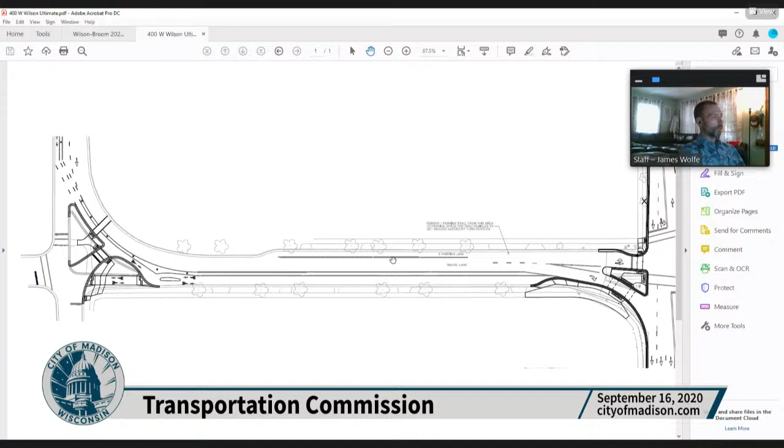Per the corridor plan, the ultimate plan on the 400 block would be to reduce this to a single travel lane, maintain the parking lane on the northerly side, and then we could mark the 10-foot two-way cycle track on the south side with a buffer on the street.

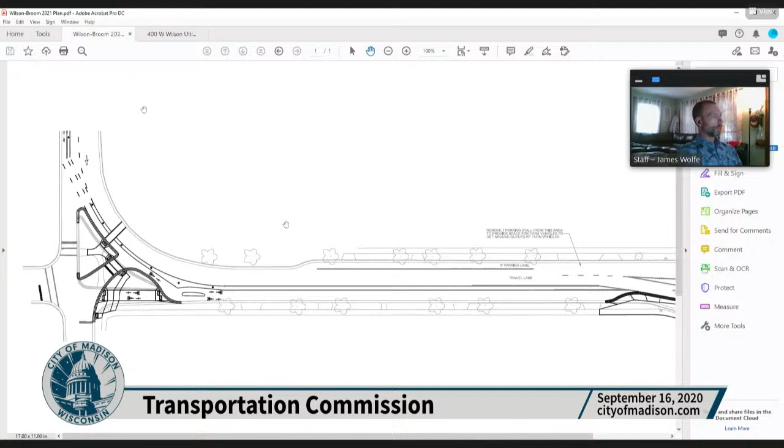So all of the curb work at the intersection with the shared use path and everything will be set up for this ultimate condition. It'd just be a matter of redoing some of the markings in the future whenever the Bassett corridor plan and the reconfiguration of the Bassett and Wilson intersection will get completed. I think that's what I have in terms of a presentation on the geometrics.

Okay, are there questions or comments for Jim? Grant? And then Bridget. Thank you. Yeah, no questions. Just wanted to say thanks again for all the great design work on here. I'm glad that we waited for the corridor study to be complete, and I think we've got a really, really great design here. And also thank you for working on that intersection, getting that little bit of an improvement there with the bump out, and also really looking forward to implementing the Bassett corridor to be able to continue the cycle track through that 400 block.

So I think this is a really, really exciting project, and it's really going to be a huge improvement to bike access in the downtown area. So thanks for all your work on it.

Thank you. Oh, Bridget? One other thing that I thought of, I'm sorry, can I interject just another thought? Sure. Another part of the discussion was at the Doty intersection. I did check in with Gretchen, and we would be able to provide a leading pedestrian interval here for the bike and pedestrian crossing. I noted that on the plan, but didn't specifically mention it as I was going over it. Thank you, Jim. Bridget, go ahead.

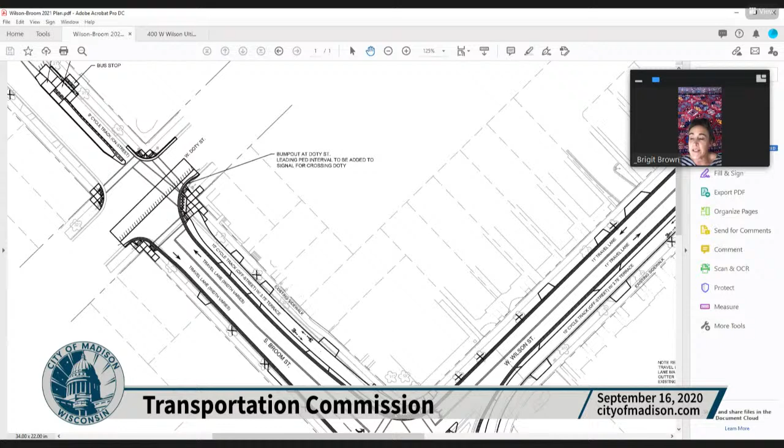Yeah, Jim, first, thanks for the presentation. I'm wondering about the signing plan, when that might be available. Typically, that is done internally by traffic engineering staff, and is usually available a little bit closer to the end of the construction project because it isn't part of the bidding documents. So I guess I'd just like to then provide input now. I know a lot of my neighbors, myself included, use those first two driveways there.

And with the bidirectional traffic coming, I know there's a lot of concern, particularly because even now it can be difficult for us to be able to pull in and pull out with some of the traffic speeds there. So, we'll have slightly more constrained motor vehicle traffic there with one travel lane and the addition of the bidirectional bicycle traffic.

So I just want to make sure that careful consideration is given to signing in that area, in terms of notification as appropriate for all types of traffic about the driveways, and particularly for Doty School right on that corner there. It's just a tough, congested area, as I'm sure you're aware. Yes. And another thing to note too that may be helpful for the driveway access is we will be making signal phasing improvements at the intersection here too.

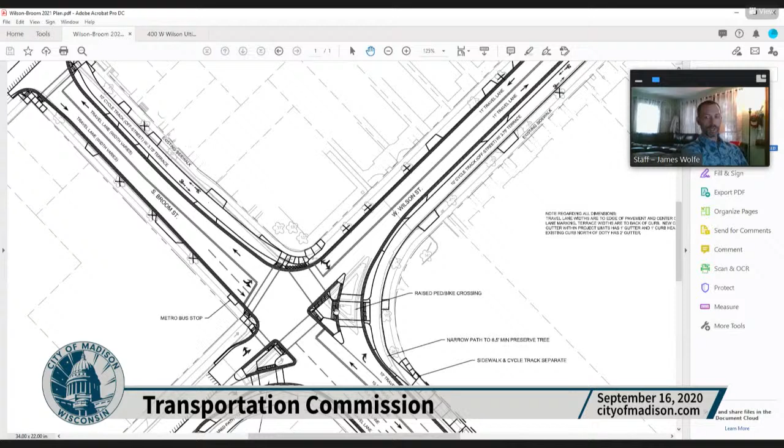And I guess along those same lines, then, if you can be sure to make working actuating buttons for pedestrians. Those don't exist at this time on all four corners. Yeah, we can certainly take a look at that. Some of it is going to be a little difficult, especially with how we plan to signalize this right turn lane, that during all times we want to have this crossing have the priority, so this right turn signal is going to be a flashing yellow or a red.

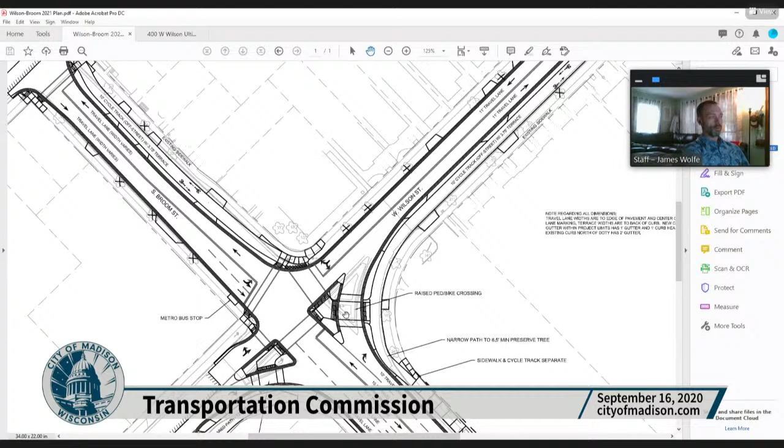So when we do that, I don't think there's going to be a specific ped signal there. Is that correct, Gretchen? I think I saw you were on. Yes, that's correct. And I am thinking more, frankly, about the northern Broom Wilson corner that doesn't have a ped signal right now. This one, up here? It has a button, but no signal, which is an odd combination.

And then one other thing quick, you did mention that the kind of southern, for lack of a better description, limit of the project is at John Nolen. Yes. Right. And I guess it is right outside of that limit, but I've had a lot of issues lately, especially with folks turning onto Broom from John Nolen and nobody stops, and being able to cross as a pedestrian right there has gotten progressively more difficult.

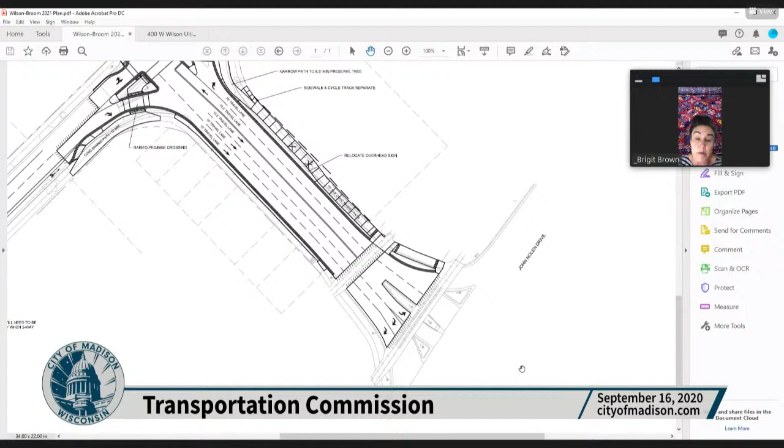And I know it's just outside of the project limit, but if there's something with signing just outside of the project limit that could be done there, really nobody stops at the stop sign there. Oh, on this right turn? Yep. Gotcha. I think we are going to signalize that right turn. Great.

I think Gretchen was going to maybe try to do it earlier, but I think with the project pending, we're holding off until the project was done. Okay, I think that would be a great improvement. Thanks. The right turn will be signalized. Great. Gretchen or Yang, did you have comments about that?

Yeah. Thank you, Bridget, for those good comments. As Jim mentioned, we typically do the signing plans a little bit later because those are done by our crew in-house, not part of the bid document. So we'll definitely keep those in mind, look for opportunities to improve. So really, I think they can go hand in hand with the others, like other ped bike improvements, signal timing

improvement. It's our goal to improve the ped bike access in this area. Traditionally, as we all know, it's very tough. Hopefully, in other projects, we can improve it significantly. So, yeah, thank you for the comment. Okay, are there other comments on the project, on the geometry? Anybody? Okay, I don't see any hands.

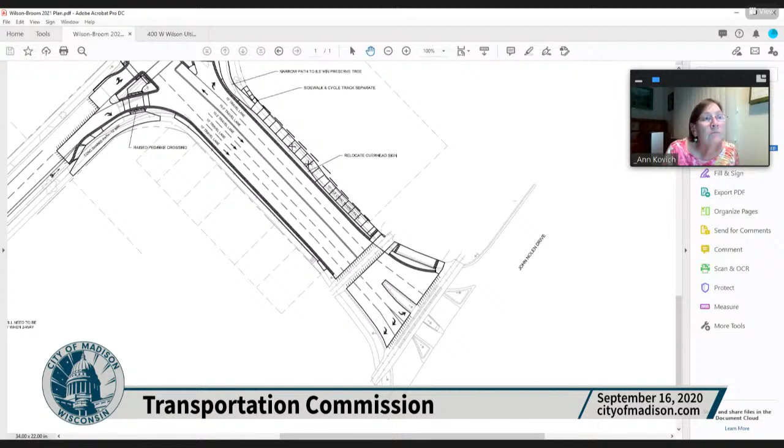So I would need a motion to approve. I'll move approval. Okay, I'm sorry, who was that? Chris. Chris? Okay, and I see, Grant, you had your hand up as well? And Bill? Somebody want a second? Is that what your hand was up for, Grant? Yeah, I second. Okay, so we have a motion and a second. Bill, did you have further comments or were you seconding? Okay. Is there any further discussion?

Okay, we'll assume a unanimous consent approval of the resolution for the roadway geometry. Unless you prefer to vote no, if you would, please raise your hand. Or if you'd like a roll call. Okay, I don't see any hands raised, so the motion carries as unanimous consent. Thank you very much, Jim. Looks like a lot of great work has been done on that intersection. Thank you, Gretchen and everybody.

Okay, next we have the BCycle annual update. Do we have those folks on, Renee? So they were in the attendees, I think. Oh, yep, here they are now. Okay, so we have Helen Bradley and Brian Conger. I don't know if I'm saying your names correctly there, Helen and Brian. Yes, you got it right.

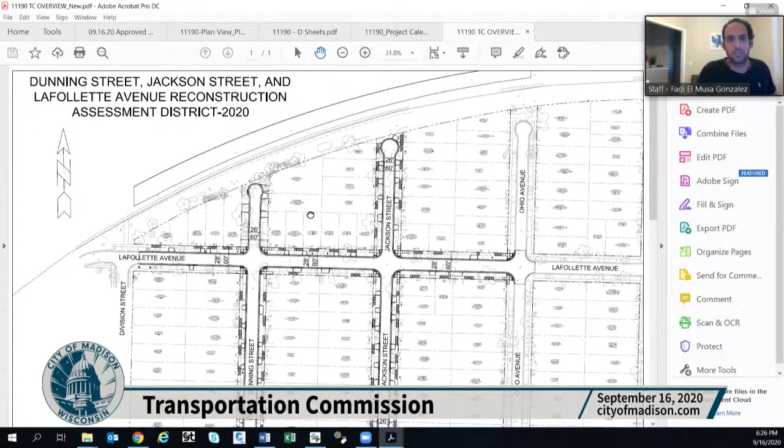The limits of the project are La Follette Avenue, just east from Division Street to Ohio Avenue. We have Dunning Street from Atwood Avenue to the dead end on the north side, just short of the railroad. And finally, we have Jackson Street from St. Paul Avenue on the south side to the street's dead end on the north side, also just short of the railroad. So this is a typical street reconstruction project on a residential area.

With this project, we're proposing to replace the existing curb, gutter, pavement, driveway aprons, and sidewalk segments that are in poor condition. So with this project, we're not proposing to have any changes to the current geometrics. As you can see, I'm going to zoom in on Dunning Street.

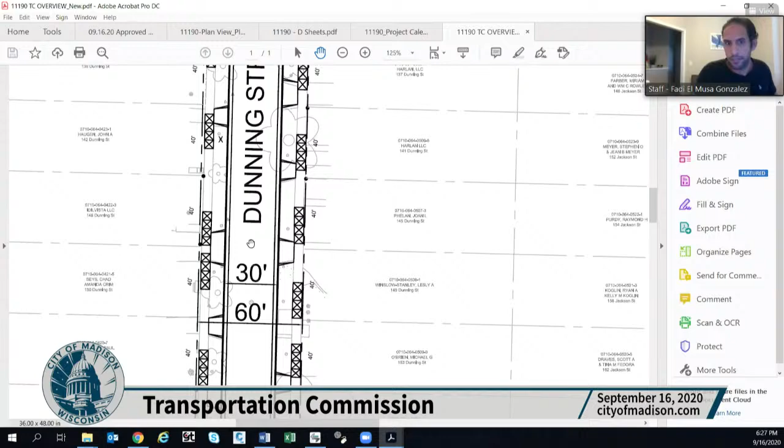Basically, we are replacing the curb in the same location as the current curb. So the proposed width that we have is 30 feet on Dunning Street, 26 feet on Jackson Street, and 28 feet on La Follette. So as I mentioned, all of the streets are going to keep the same width as they are right now, except the section of Dunning Street north of the Dunning and La Follette intersection, so that would be this portion right here. At this time, that section does not have any pavement, curb and gutter, or sidewalk. So with this project, we are proposing to have pavement installed, also curb and gutter on that street. So that street would be 26 feet wide, measured from face of curb to face of curb.

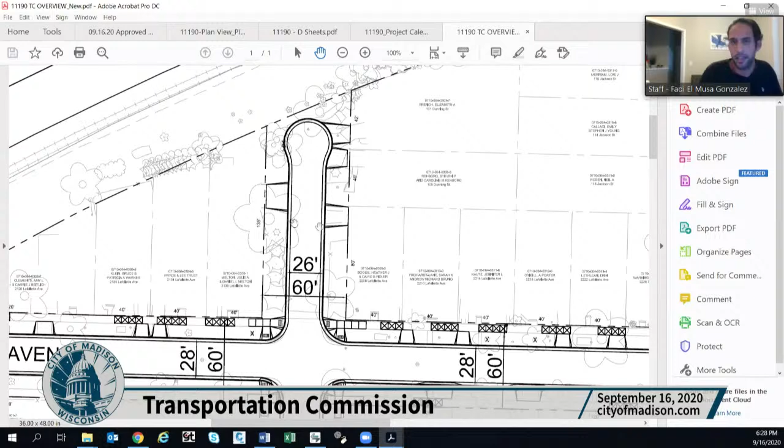Also, please note that we are not proposing any sidewalk on either side of this section.

Also, with this project, we're proposing to replace all the pedestrian ramps. Right now, most of them do not meet ADA compliance, so those should be replaced and installed per those ADA guidelines. On the south side of Dunning Street at the Atwood intersection...

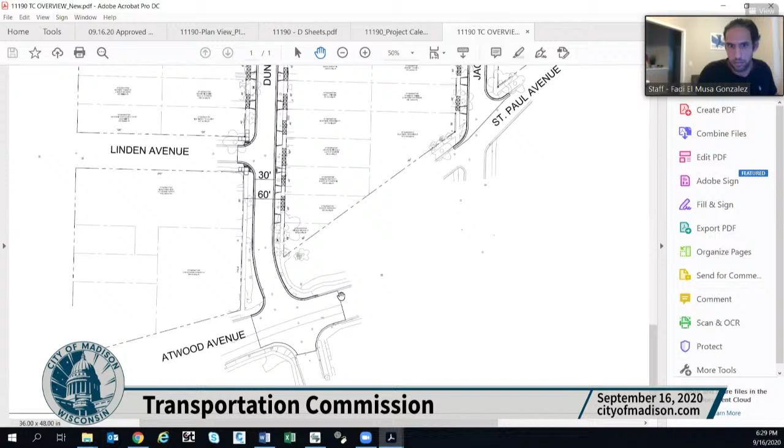At Dunning and Atwood intersection, we're proposing to replace the existing pavement and pavement markings. So that would be the section that I'm showing on my plan here, shown within the black line.

And finally, we are proposing to have some bike sharrows on La Follette Avenue for the bicyclists that are using that as a bicycle route. So that pretty much covers the scope of the project.

So last week, we held a public information meeting. Basically between 30 and 40 people attended that meeting, and some of them presented concerns in regards to high traffic speeds on Dunning and La Follette specifically.

So we had traffic engineering staff there, and because of those concerns, traffic engineering is going to do some studies. They're going to be collecting data next month to see if we can install speed humps on Dunning and on La Follette Avenue.

If those studies justify the installation of those speed humps, that plan should be presented before the TC for review and approval. So I think that pretty much describes the plan. And that's it.

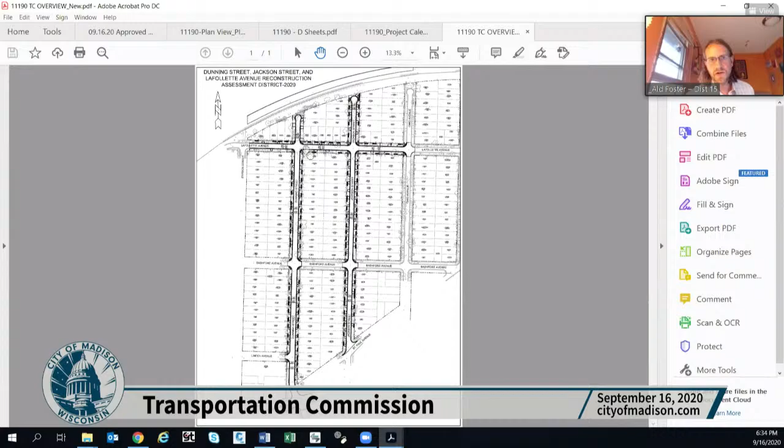I think it's interesting, if you zoomed in a little bit on this, the two streets where they're talking about speeding are also the two wider streets here. So nobody mentioned speeding on Jackson, which is only 26 foot wide. I was reflecting on this in this neighborhood, I checked in. Worth Court is a good example where, as a person on a bike, there's nobody ever speeding there because it's so narrow. It's a two-way street with parking on both sides, and it's only 24 foot curb to curb.

I think South Bryan was recently redone. And again, I find it really has a really good feel, and there's not speeding there. That's also 24 foot.

That one's only got parking on one side. I know that in the past, the fire department has raised some concerns about narrower streets, but I think there's quite a bit of good information out there around that. And given this opportunity for a full reconstruct, I'd really like to take a serious look at that.

What would it mean if we brought these down, at least to 26 like Jackson, or even 24? I know I've heard some complaints from my residents in the wintertime, and they feel like it's just way too narrow, but it's kind of exactly what works to bring car speeds down, because you can't just fly through. You have to sort of navigate it.

I'd really ask that before making a decision on speed humps, if we could really consider street narrowing with this project, because I think it could have a positive impact on the speed concerns. And also, it's just less pavement. I would expect it would be less cost, by pulling that out, and gives us more green space, wider terraces, more infiltration for stormwater. So I think that's pretty consistent with where we're trying to go. So thanks for the presentation.

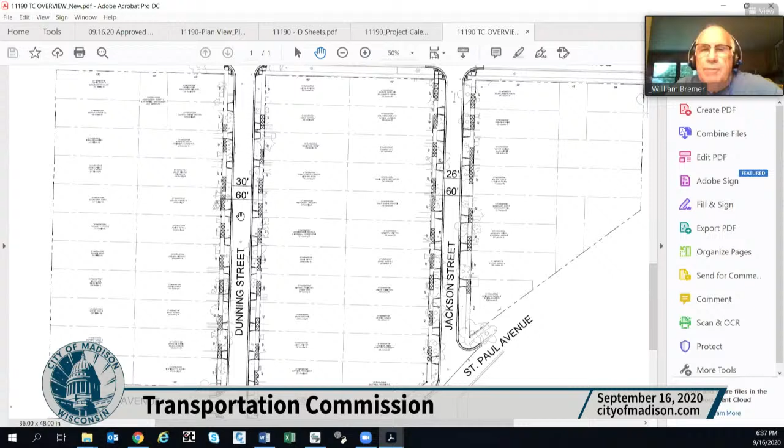Okay, thanks. Bill, go ahead. Thanks. I'd like to second what Grant talked about as far as narrowing down Dunning, see if that's possible. But instead of resorting to speed humps, which I hope you don't have to, you might look at speed tables at a couple of the intersections instead of speed humps, so it's a little bit safer for the pedestrians to get across instead of just in the mid block. Thanks.

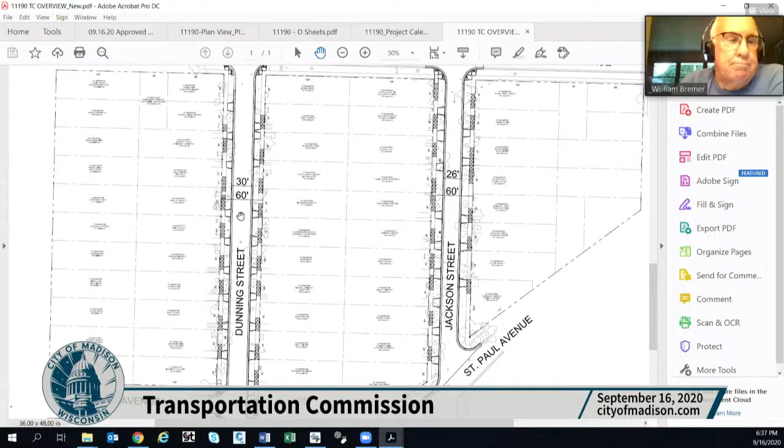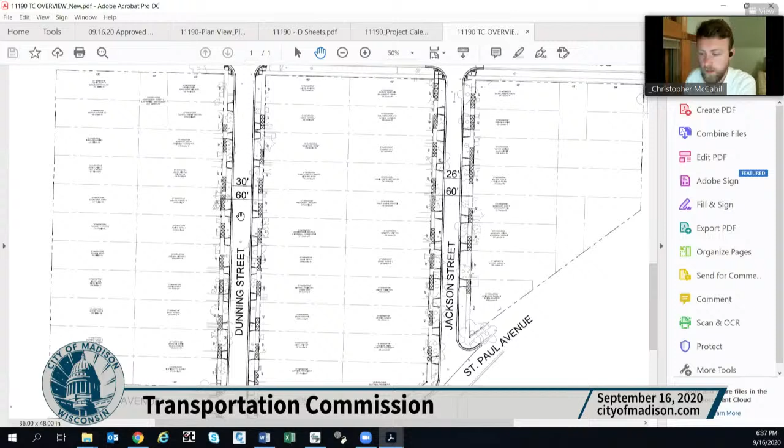Okay, Chris, go ahead. Thanks. I think my question kind of relates to this discussion about Dunning Street, but I was thinking specifically about that northern tip, the little cul-de-sac that's getting done for the first time there. And you mentioned how there's no sidewalks, which I think is fine. But it did make me wonder if there are design cues that can be used to indicate that this is not just a road, it's also where pedestrians are going to be walking.

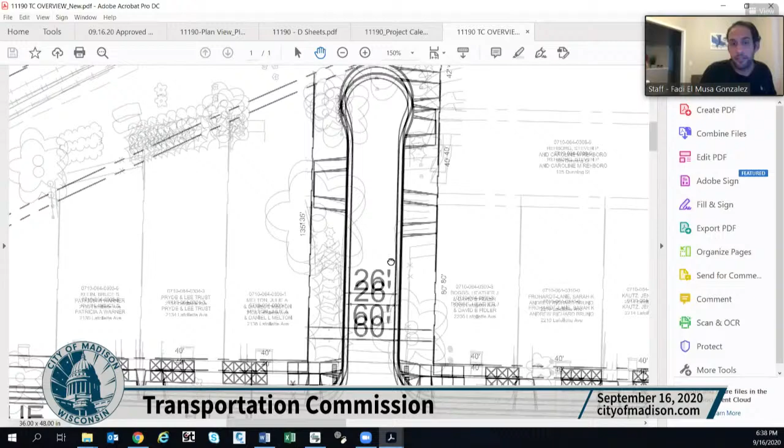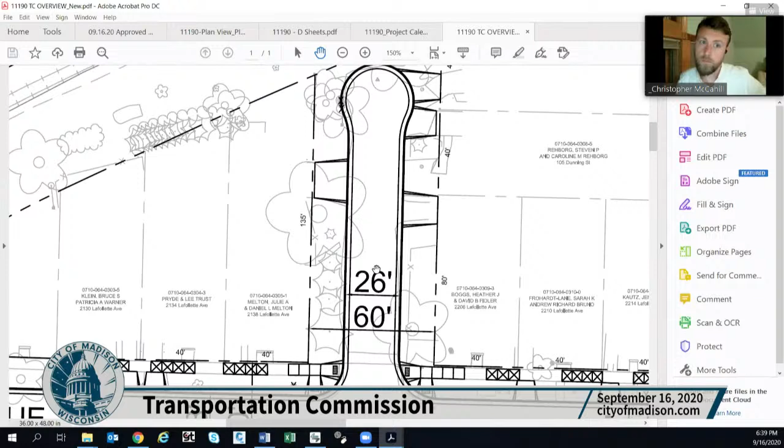Was that for me? I don't know who can field that one. Okay, so we can look at that. The reason we're not including sidewalks on this section is, first, we have multiple trees here that are in good condition and safe, plenty of them. That's one of the reasons why we're reducing what's going on south of the intersection. We're not proposing 30 feet, we're proposing 26 feet wide. Also residents on this block specifically reached out, and we had an on-site meeting, and besides that they love the trees, they do not want any sidewalk.

They understand that would be a massive cost, since a new sidewalk would need to be 100% assessable to them. I think not having sidewalks is the right decision here. I was just wondering if there are design cues you'd think about applying on the street, maybe the entrance to the street, that indicates to folks it's a shared space for drivers and people walking. That's something I've got to look at. Definitely, I'm going to look to see if there's something that can accommodate what you're requesting.

Yang, is that something you can comment on? Yeah, we can work with Fadi, do some brainstorming and also look at examples from other communities to see what we can do. But generally, these are very low volume streets, so hopefully pedestrians will feel safe. But I think it's worthwhile to look into whether we can improve that. Yeah, I don't think it's an issue here necessarily, but maybe a good opportunity to think about how that might be tackled in the future also.

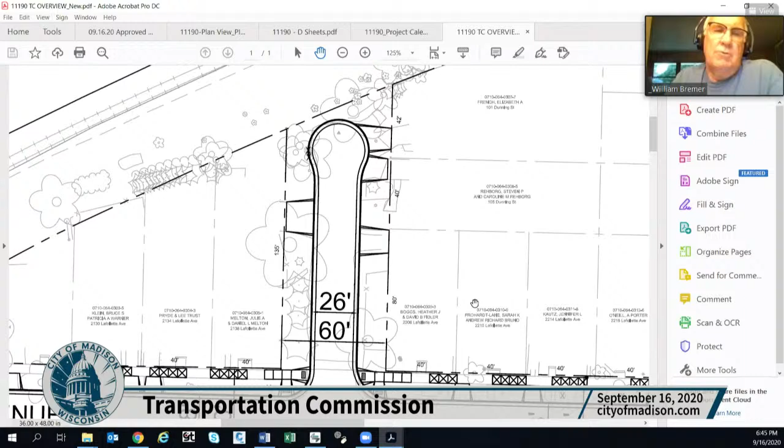I did, but I'll just say that I like the idea of narrowing up the cross section right at the sidewalks, and if you made a speed table there, you could have the sidewalks at the same level or a reduced level. And if you do have the bulb out or choker point, that does indicate where the cars should not be on that little short street, so that's where the pedestrians could walk. Thanks. Okay. There have been a lot of great suggestions. Does anybody have any other comments at this point?

So you've heard a lot of information here. It sounds like it may potentially come back to us if there's traffic calming involved. Were you intending to bring it back with all of the additional comments you've heard? Fadi or Chris, I'm not sure what your thoughts are. Yes, so, Chris, you're gonna say something? I was just gonna say, I think we could handle all those comments, and like Fadi said, if speed humps are proposed, then that would definitely come back. So I think that would cover it for us. Okay.

Okay, so you're going to take into consideration all the suggestions people have made, and if speed humps are proposed, it would come back to the TC. Any comments about that plan? I don't see any hands up. Okay, a lot of great suggestions and a lot of things we've been talking about at our traffic calming subcommittee. These are always very interesting discussions. Are there any additional comments, or Fadi or Chris or Yang, did you have any additional comments?

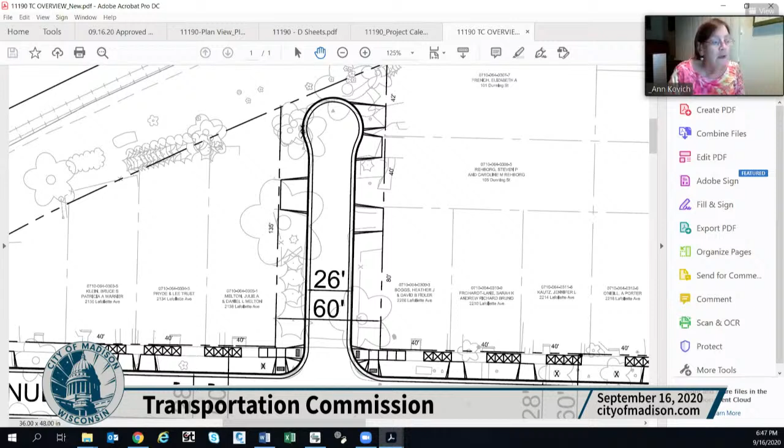No, I'm good. Okay, all right, great. Well, thank you very much. Thank you. All right, thank you. Next we have, we can unshare the screen there.

Thank you. Great. We're at item 9 on the agenda, which is an update on the traffic calming subcommittee.

Bridget, Harold, Grant, Bill, and I are all members of the subcommittee, so anybody can add any additional comments. At the meeting last Thursday, we reviewed the current traffic calming programs that we have in Madison and some of the ranking systems and points. And then we spent quite a bit of time talking about traffic calming programs in other cities, which is very interesting. We have an additional meeting tomorrow, and we plan to work on our early program recommendations, which would be presented at the joint TC-TPPB meeting on September 30th.

Program goals, components of a successful program, how many different programs we think there should be in Madison, whether we should have one program or more than one program. I'd just like to thank Patrick. We had asked him for a way to store all of the tons of documents that we've been receiving, and he added a traffic calming subcommittee folder in Legistar, 62232, that's showing on your agenda. So anytime you're looking for anything on the traffic calming subcommittee, all of the documents are in that one folder. So it's a really great way to keep track of everything. So thanks for that, Patrick.